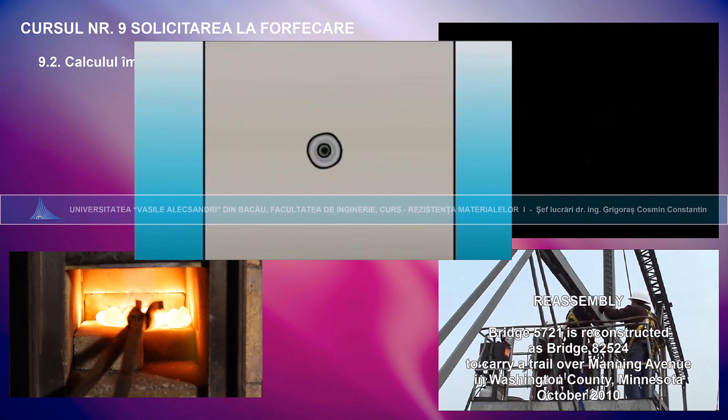Rivets are strong, lightweight fasteners. Here's how a pop rivet works. A rivet has a shank and a mandrel. The rivet is inserted in a hole drilled through two materials.

A rivet gun pulls on the top of the mandrel, expanding the shank. As the shank expands, pulling on the mandrel clamps the two materials tightly together. The force from the gun then snaps off the mandrel head at a pre-made breakpoint. It's called a pop rivet because of the sound the head makes when it snaps off.

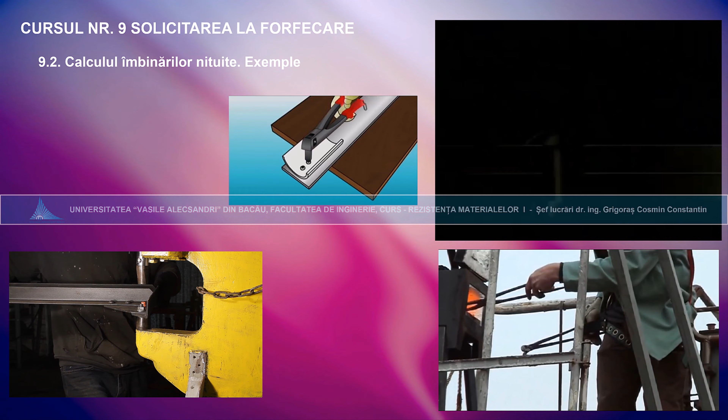Every possible projection from the outer surface of the airplane, everything that would induce turbulence with its attendant drag, must be reduced to a minimum. The use of a rivet whose head is flush with the surface being riveted eliminates the drag of the ordinary rivet head and thus aids in accomplishing our higher speeds.

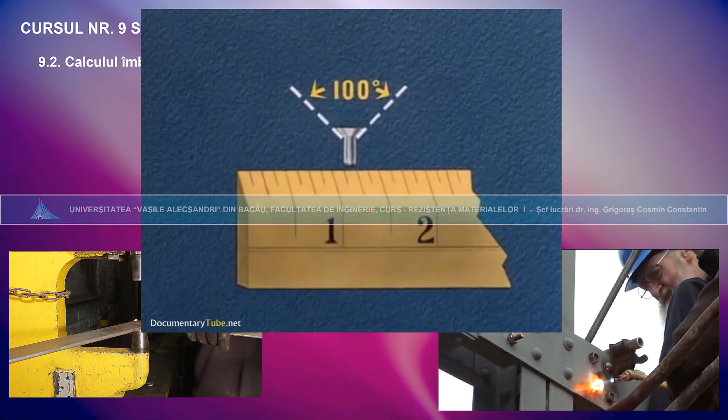The choice of method used in flush riveting is based on the thickness of the sheet next to the manufactured head. Let's assume we're driving a rivet 1/8 inch in diameter with a 100-degree countersunk head. Probably the best production method involves sheets of 40 thousandths thickness or greater.

We start with the assembly of the sheets, drilling the correct size hole for the given rivet. We're using a 1/8 inch rivet, so we drill a number 30 hole, then countersink, using a special countersinking tool with a 2-flute cutter and with a 100-degree cutting angle and number 30 pilot.

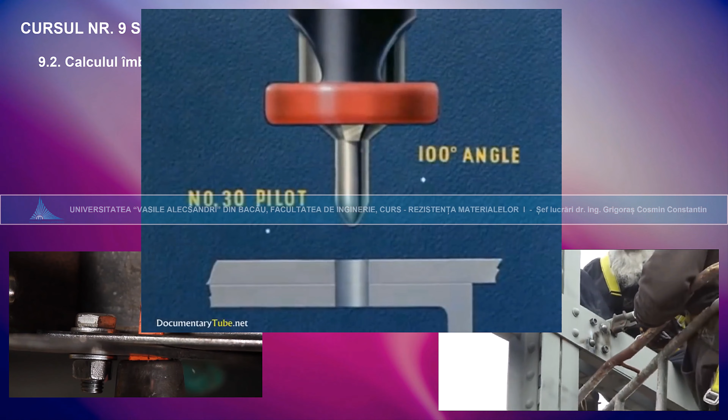Unless specific approval has been obtained from the stress engineer, the countersinking should not go through the first sheet. If sheets are properly clamped during countersinking, it is not necessary to disassemble them for deburring, which is a costly operation.

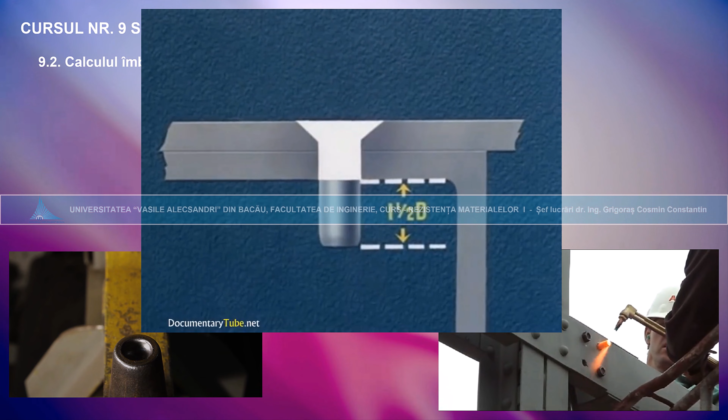Next, we insert the rivet, the length of which has been determined by adding 1 1/2 times the diameter of the rivet to the grip. The grip, as shown here in white, is equal to the total thickness of the material being riveted. A vibrating type air gun with a flush rivet set and a regular bucking bar may be used.

Ordinary riveting technique will do for driving of this type rivet. The finished rivet should have a formed head, 1 1/2 times the diameter of the rivet and about 1/2 the diameter high. The flushness of the rivet, as determined by aerodynamics, must run in the neighborhood of plus or minus 2 thousandths.

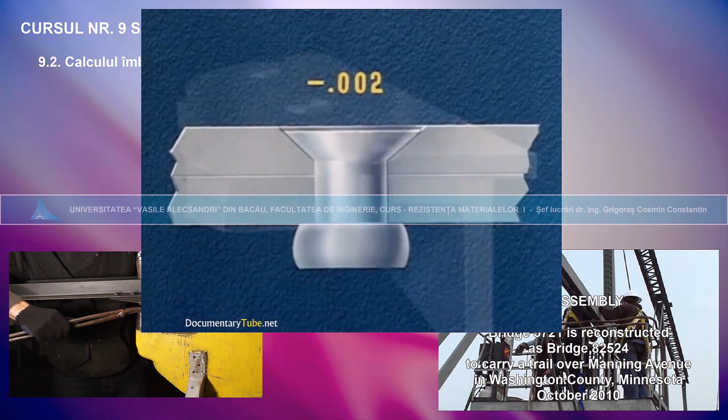We have just demonstrated the countersink method of riveting. This is a method used when both sheets are over 40 thousandths in thickness.

Structural requirements make it necessary to dimple the sheet next to the manufactured head if this sheet is under 40 thousandths in thickness. This double dimple method is used for flush riveting thin sheets.

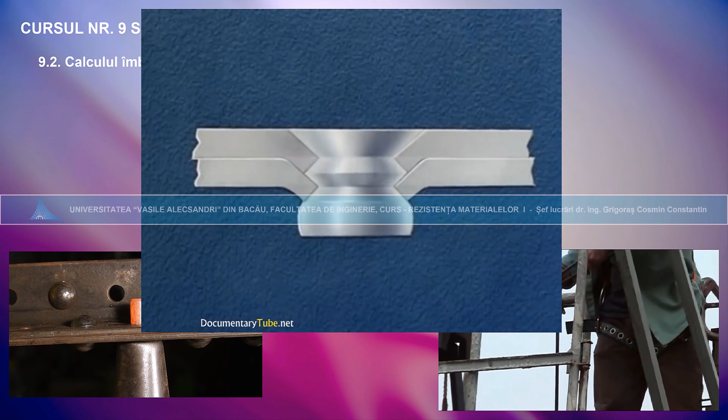Here again, we start with the number 30 hole and follow this with insertion of the rivet. The length of the rivet is again the thickness of the material plus 1 1/2 times the rivet's diameter.

The driver uses a standard flush rivet set. The bucker uses a special dimpling set that has been adjusted by the tool department to give the correct angle and depth of the dimple.

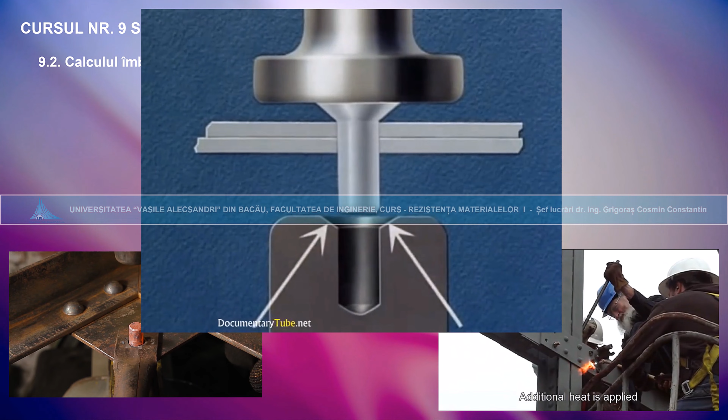Using the rivet as a punch, we dimple the two sheets together into the dimpling set. The special dimpling set is removed. The driver retains the standard flush driving set. The work then proceeds with the bucker using an ordinary bucking bar.

Driving this type of rivet requires greater skill than was required in the previous method. Any clinching or offset of the rivet will cause the dimpled edge to crack. The rivet must be driven straight.

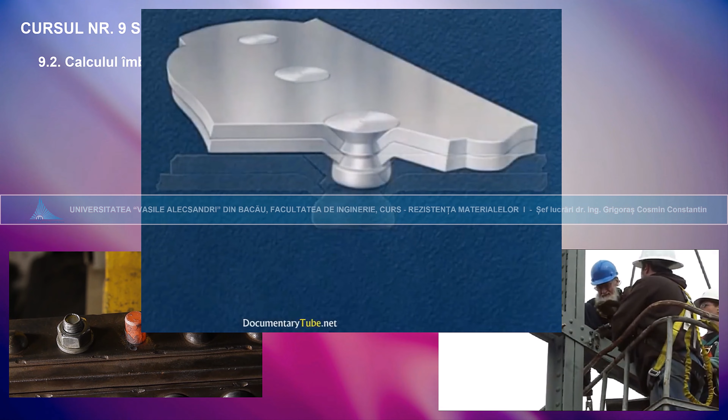We have just shown the double dimple method of riveting. This is one of the methods used when both sheets total 40 thousandths or less in thickness.

A third method, used for riveting of slightly heavier gauges than in the last method, involves a separate dimpling of the sheets. Again, we start by drilling our number 30 hole. The sheets are then disassembled and machine dimpled separately on the squeezer.

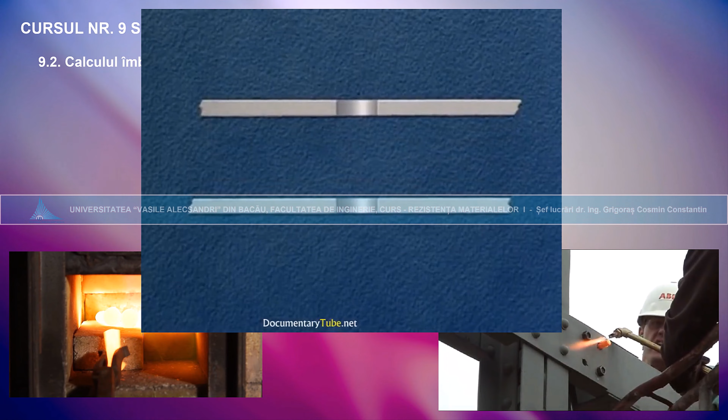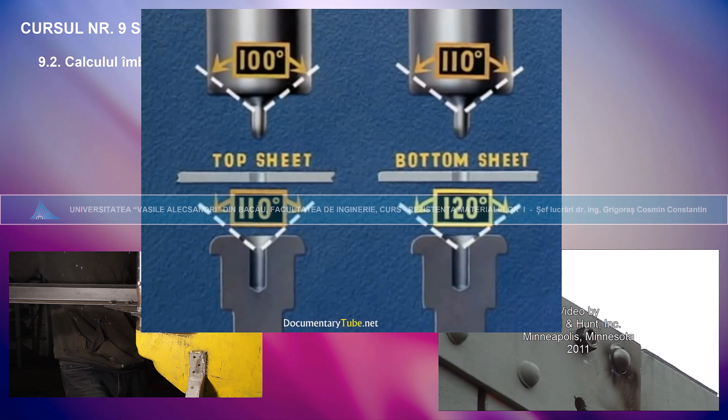Note the angle of the dimpling tools. The dimpling punch for the top sheet has an angle of 100 degrees, the same as the rivet head. The dimpling die has an angle of 110 degrees. The dimpling punch for the bottom sheet is also 110 degrees to correspond with the top sheet, and the dimpling die is 120 degrees. This difference is necessary in order to get a good nesting of parts.

Upon completion of the dimpling operation, the parts are reassembled. Sheet metal riveting clamps are used to hold the parts together until riveting is completed.

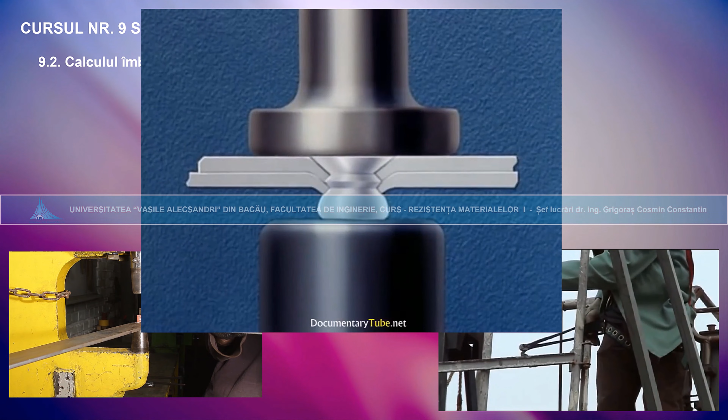The rivet is inserted, and from here on the work proceeds using a regular flush riveting set and the ordinary bucking bar. Driving this type of rivet requires the same skill on the part of the operator as in the former dimpled method. It is very important that the rivet be driven straight.

We have just illustrated the pre-dimple method of riveting. The sheets were taken apart and machine dimpled separately on the squeezer. This is a method used when the sheets are too heavy for the double dimple process.

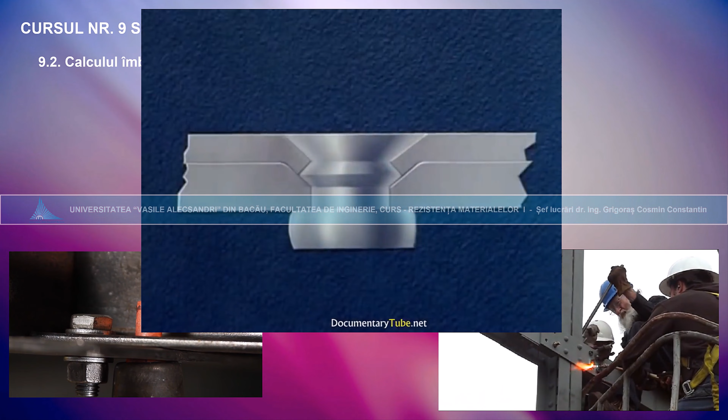For sheet gauges where the top sheet is too thin to countersink and the bottom sheet too thick to dimple, we must use a combination of pre-dimpling and countersinking. The top sheet, being under 40 thousandths, must be dimpled. The bottom sheet, being over 40 thousandths, will be countersunk.

Again, we start by drilling a number 30 hole. Sheets are disassembled and the upper sheet is machine dimpled using special dimpling tools on a squeezer-type machine. The bottom sheet is countersunk using the special countersinking tool.

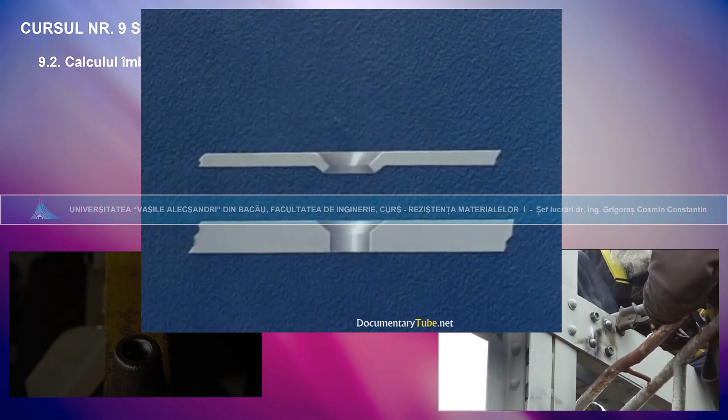The angles of the dimple and countersink are very important. The angle of the dimple next to the rivet must be 100 degrees because the rivet head is 100 degrees. The angle on the opposite side of the sheet is 110 degrees, and the angle of the countersink is also 110 degrees.

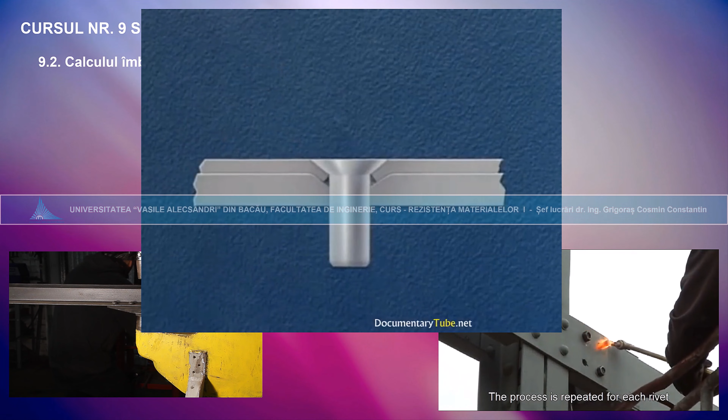Parts are reassembled using sheet metal clamps. The rivet is inserted, followed by driving the rivet using a standard flush driving set and bucking bar. This riveting technique is fairly simple because there is no lip on the undersheet to cause cracking or failure from clincher rivets.

We have just demonstrated the combined countersink and dimple method of flush riveting. This combination is used in cases where the sheet next to the rivet's manufactured head is too thin to be countersunk, and the bottom sheet is too thick to be dimpled.

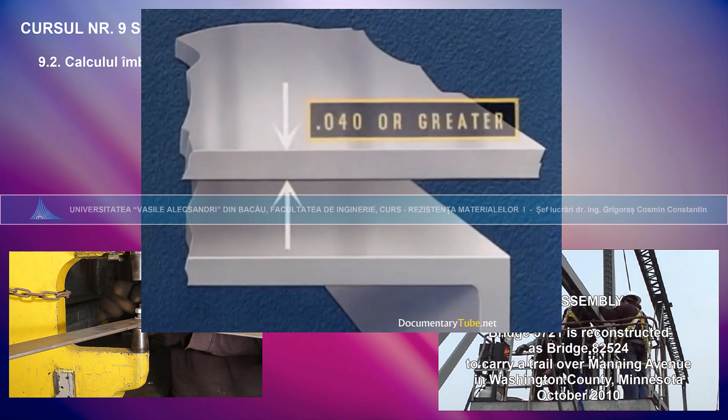Now let's review the four methods of flush riveting just demonstrated. Countersinking is used when the top sheet is 40 thousandths thickness or greater. The flushness of the rivet is obtained by setting it into a hole countersunk by a special tool.

Double dimpling is used when the total thickness of the sheets being riveted is 40 thousandths or less. In this method, the flushness of the rivet is obtained by using the rivet itself as the punch to form the dimple.

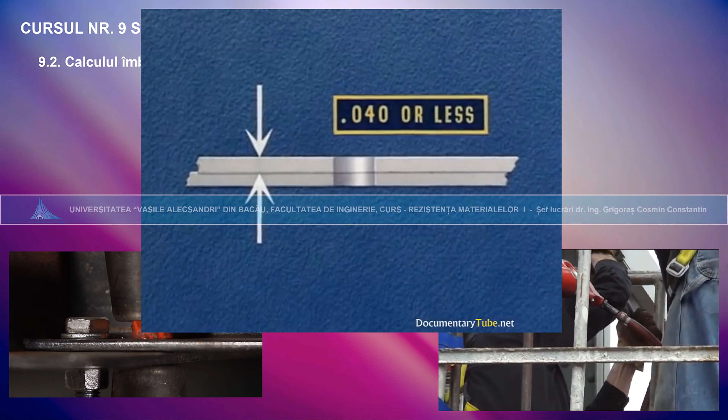Pre-dimpling is used when the top sheet is 40 thousandths or less, and the total thickness of both sheets is over 40 thousandths and under 90 thousandths. The flushness of the rivet is obtained by setting it into a dimple formed mechanically on a squeezer.

Combination countersinking and dimpling is used when the top sheet is too thin to countersink and the bottom sheet is too thick to dimple. The top sheet is dimpled and the bottom sheet is countersunk.

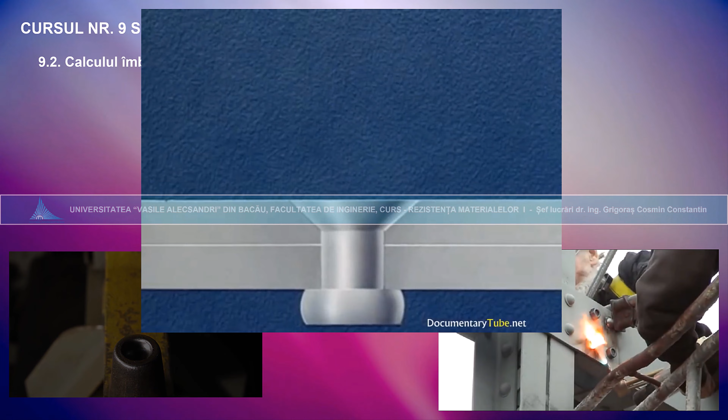The result obtained by each of these different methods is the same: the head of the rivet is flush with the surface so that turbulence or drag is held to a minimum.

With the ever-increasing demand for greater speeds in aircraft, it has been necessary to remove every possible projection from the outer surface of the airplane. Everything that would induce turbulence with its attendant drag must be reduced to a minimum. The use of a rivet whose head is flush with the surface being riveted eliminates the drag of the ordinary rivet head, and thus aids in achieving greater speed.

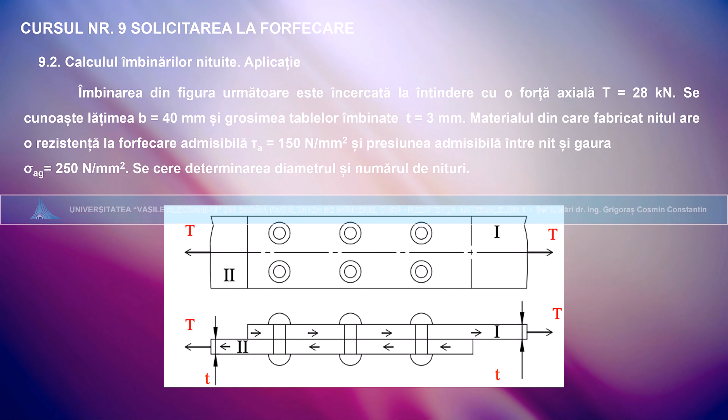What is TIG welding? TIG stands for tungsten inert gas welding. The American Welding Society calls this process gas tungsten arc welding, or GTAW. You might also hear it called heliarc welding. TIG welding uses a tungsten electrode.

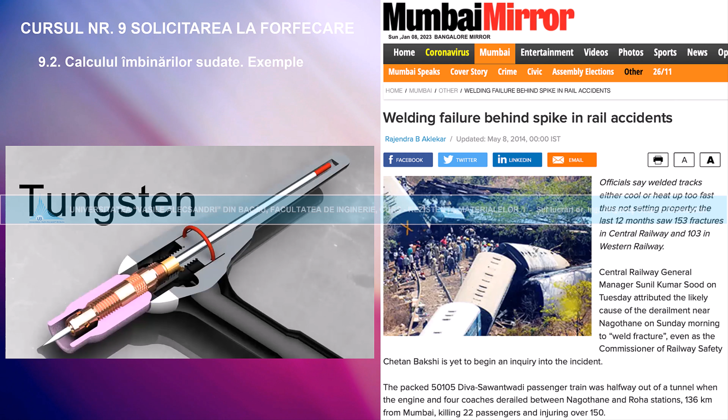Tungsten has an extremely high melting point. When you TIG weld, the electrode gets hot but it doesn't melt. We say it's a non-consumable electrode. That doesn't mean it lasts forever, it just means it doesn't melt and become part of the weld. In a lot of other welding processes, the electrode melts and becomes filler metal. Those are consumable electrode processes.

Here's the tungsten electrode being held in a TIG torch. The electrode slips into a collet, and the collet tightens up against the collet body. You can adjust the length that the electrode sticks out of the holder by loosening up the end cap. When you tighten the end cap, the collet clamps down on the electrode.

TIG works by melting the base metal, which is the metal that makes up the two pieces to be joined. The heat is generated by an electric arc that forms between the base metal and the tungsten electrode. You can control the amount of heat with a foot pedal or with a thumb wheel on the torch.

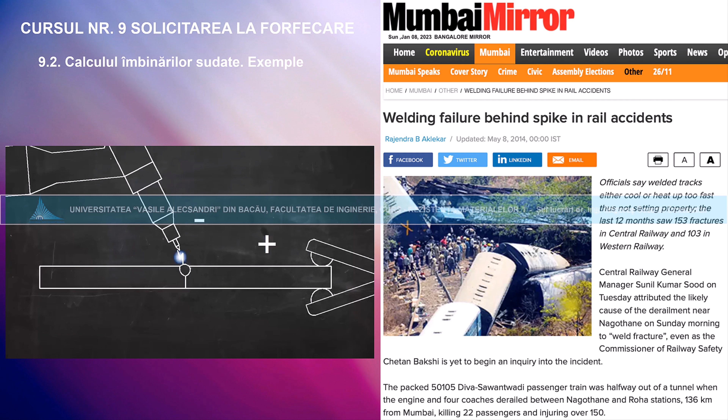For most metals, the current is direct current, or DC. DC is like the current flowing from a car battery; one wire is always negative and one is always positive. In DC TIG welding, the electrode is usually negative and the workpiece is positive. This is called DCEN, indicating the current is DC and the electrode is negative. This is also called straight polarity, but DCEN is a more descriptive term. DCEN puts most of the heat on the workpiece, and it's the most common setup.

When welding aluminum, however, AC is used. In AC, the positive and negative voltages switch back and forth between the electrode and the workpiece. This puts more heat on the electrode, but it has a cleaning effect on the workpiece. Aluminum forms oxides that float to the top of the weld pool and prevent a good weld.

AC current helps control these oxides. In an electric circuit, current flows in a loop. In TIG welding, the current has to flow in a complete circle from the machine to the torch, into the work, and back to the machine. A work lead is clamped to the work to complete the circuit from the workpiece back to the machine.

Now you can TIG weld with or without filler metal, and that's not a choice you have in a lot of other processes. If you want to add filler metal to a TIG weld, use a filler rod, which is just a rod of metal with a specific alloy. You want to make sure the filler metal is compatible with the base metal and has the strength required to do the job.

In TIG welding, the molten metal is protected by a shielding gas. This gas, usually argon and sometimes helium or other gases, keeps the molten metal from reacting with oxygen and water vapor in the atmosphere. This shielding gas is stored in high-pressure cylinders like these. The pressure is reduced to a usable level by a device called a regulator. The shielding gas flows through a hose and comes out right at the point of the weld.

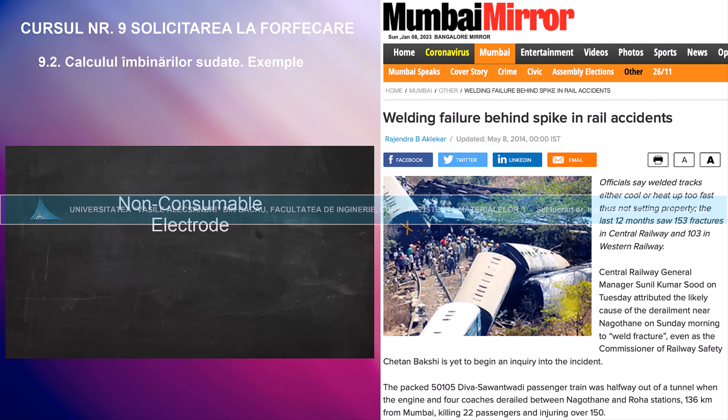So in summary, TIG welding is an electric arc welding process that uses a non-consumable tungsten electrode. The filler metal is added separately in the form of a filler rod, and the shielding gas comes from a high-pressure cylinder.